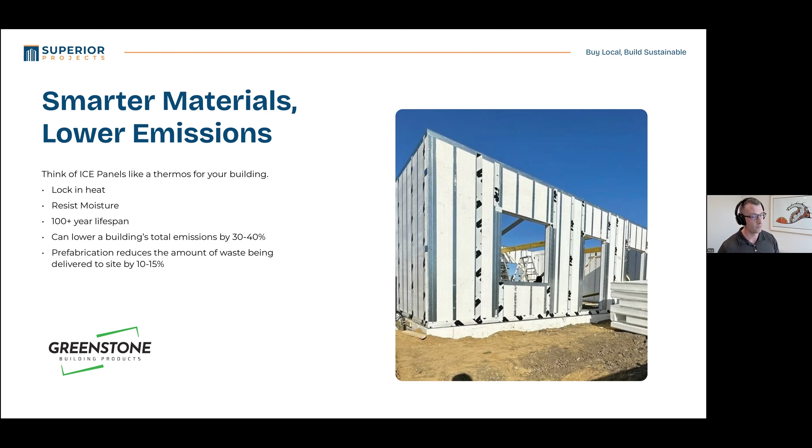You can think of ICE panels a little bit like a thermos for your building. They lock in heat, resist moisture, and provide a lifetime of permanent insulation properties. ICE panels contribute to sustainable building, but it takes more than building products to bring a sustainable building together.

Have you ever worked with a consultant who pushes for what they know versus being open to new ideas? It's easier for them. But sustainability demands creativity, technology, and continuous learning. It's incredible to have a team aligned with clients' priorities and have those priorities be sustainable ones at the same time.

In a project we're working on, it's a Super 8 hotel up in Cross Lake First Nation, or Pimachikamak. Some of the questions we got from our design team during pre-construction were very pleasant surprises. The architects, for example, LM Architecture, took an interest in learning about Greenstone ICE panels and the benefits that they could provide for the client. And they were already familiar with mass timber, so they were open to learning about new products.

And the engineering team was asking questions about the environmental cost of shipping heavier products versus constructing with lighter materials on site, and creatively designed grid lines to work with multiple systems while we explored what system would serve the client's priorities best.

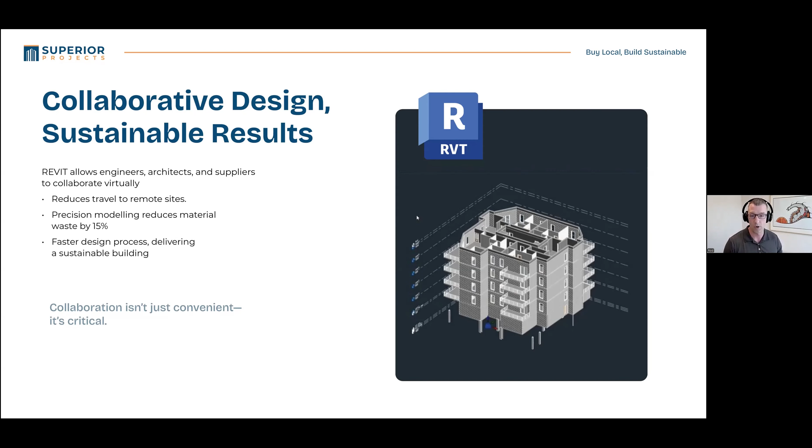Imagine spending millions of dollars on a building and it didn't capture your values or your intended purpose, but instead reflected your design team's ideas. And this happens. In our Cross Lake Super 8 project, transparency, return on investment, and cultural respect were very important to the client. And these actually tie into sustainability.

So with transparency, we're able to create an ethics accountability for the leadership within the community. And the owner gets to see the actual cost of everything, including any performance upgrades or added insulation or mechanical systems. A transparent tendering process also is a way to respect our clients' money and their reputation within the community.

On the ROI, it's not just a hotel building. It needs to be a profitable business because poverty is still a big problem within these First Nation communities. So we can't build a hotel that doesn't cash flow and doesn't make sense. So we bring to the table our experience in hotel operations and provide insight into what makes a good hotel, along with data sets and design insights to their business pro forma to make sure we're setting them up to be successful for the future as well. And that results in good information and sustainable choices by the client and a working business plan.

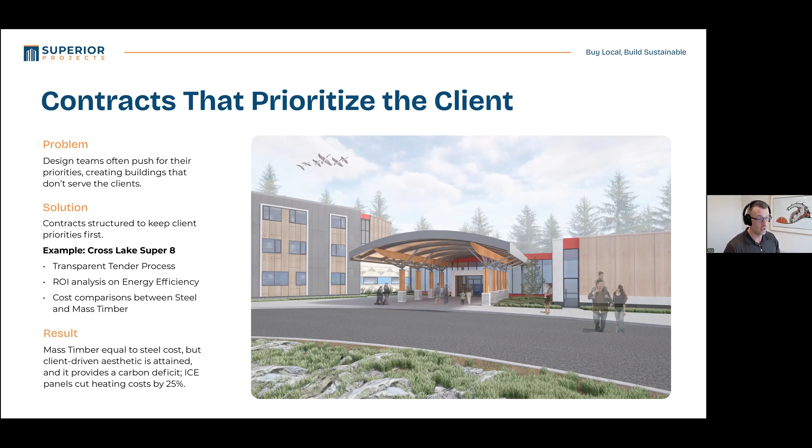And that brings me to the big picture, how local action creates a global impact. Cross Lake Super 8 proved that innovation, local supply chains, and creative teams can deliver sustainable results at comparable costs. Sustainability isn't compromise, it's an upgrade. What can you do about sustainability in your projects? Bake local sourcing and innovation into your RFPs. Don't just ask for it, require it.

Partner with firms who know your climate, community, and values. If they don't know about it, they need to be willing to learn and put in the time to learn about it. Challenge your team to innovate. Just because we've done it one way for 50 years doesn't mean that it's the right way today. In closing, sustainability isn't a buzzword, it's required for economic survival. Let's build a stronger economy together through sustainable building in Manitoba.

My presentation is a bit more on the broad strokes. Not much on data or specifics, although we can always talk about that in the comments after.

I'll talk primarily about the focus of Monteyne Architecture's work. Bobsled's been around for about a decade or so, growing from small basement renos to larger multifamily residential work.

One of the early sustainable projects for the office was the Alloway Reception Center at Fort Whyte, which our founder Tom Monteyne had the pleasure to design, working with the team at Fort Whyte, who, as we all know, are leading the way in terms of sustainable buildings and practice in Manitoba. This building was the second major building at Fort Whyte, built about 20 years ago now.

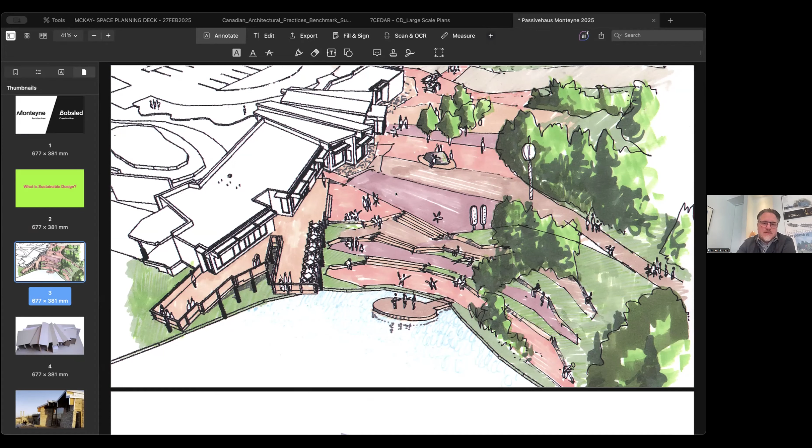It's the building you enter when you come onto site, and it has these really noteworthy Tyndall stone walls that look like dry laid stone. Some of the interesting aspects of this building are the use of a lake loop with a heat pump, so geothermal coming from the lake. At the time, it was a very well insulated, very well detailed building that performs quite well.

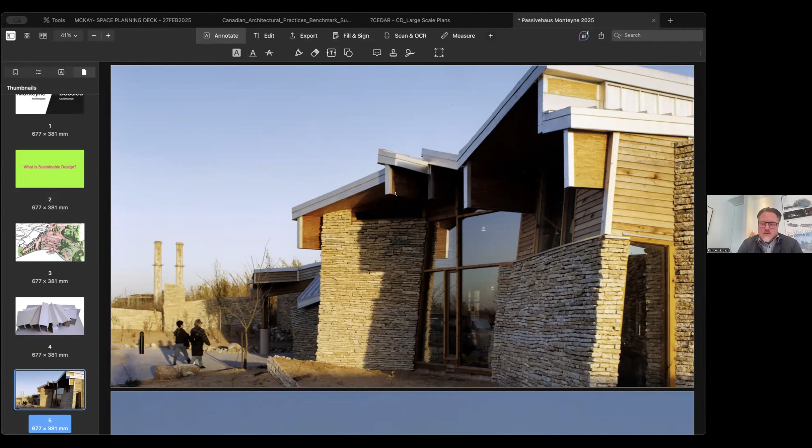It's getting to the point of end of life for some of the systems, and some of the timber is wearing out, but it's still a beautiful building.

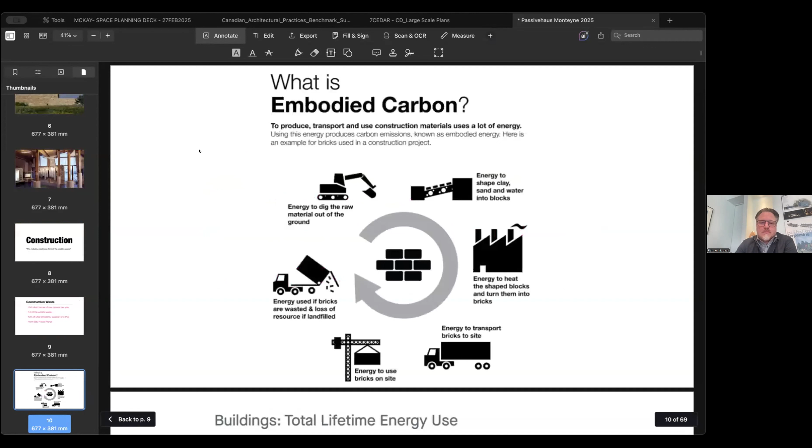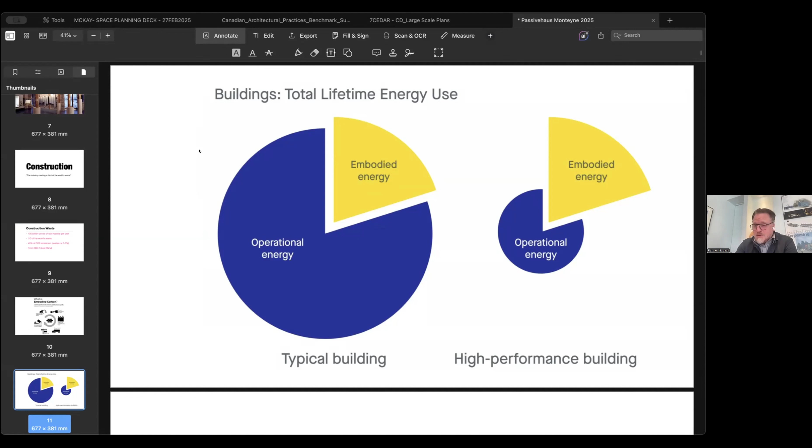As we all know, the construction industry is a major contributor to waste, greenhouse gas and carbon emissions as well. We're trying to think about ways we can improve that on a project-to-project basis. Embodied carbon, operational energy, is obviously a large portion of the energy used in a building, and a fraction of the cost of a new build. So if we focus our efforts on investment at the front end, both on design and quality construction, then it obviously pays back over the life of the building.

One of my early projects with the firm was with the Winnipeg Folk Festival, and it's not what you would typically think of as a sustainable building. The project is the backstage kitchen for the Winnipeg Folk Festival at Birds Hill, and it also functions as off-season storage. The brief requested that the building have the ability to grow, to shrink, to stay the same size, or to be removed from site completely.

In reality, that organization was accustomed to working out of tents, and this was their first foray into a permanent built structure on the festival site. But there were limitations to it. They were very concerned with the footprint on the site and being able to remove any trace, leave no trace.

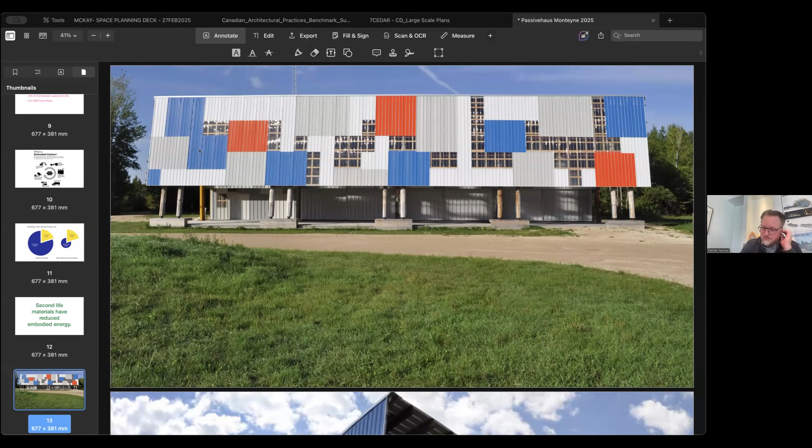I'm gonna jump ahead one slide. We were able to source a collection of industrial steel buildings that were slated for demolition. As you can see here, this is probably from, I'm going to say, 2009. This collection of buildings was being dismantled and set to go to the recycler or the salvage yard.

We visited the site. The construction manager, you see him in the center of the photo, I think in the white frame. It was thought we might just be able to use one or two of these buildings and call it a day. We quickly realized that they weren't appropriate for the design that we had.

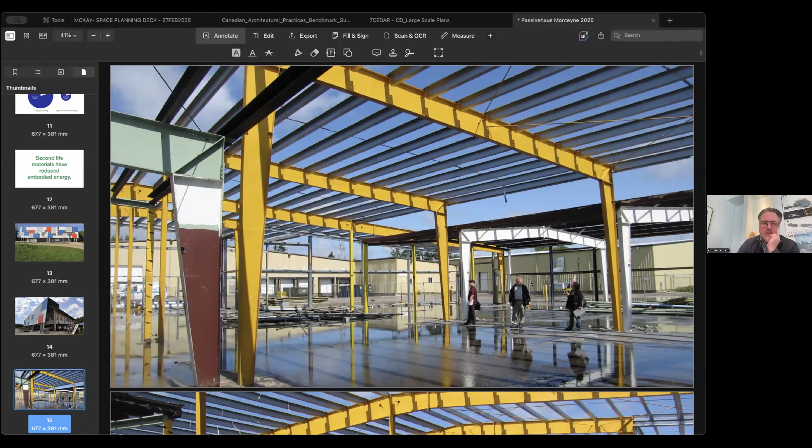But after looking at it, we recognized that the span maybe could work, and with the benefit of a creative structural engineer, we were able to look at rotating, reconfiguring, and reassembling a lot of these pre-engineered steel frames in a way that would work for the project.

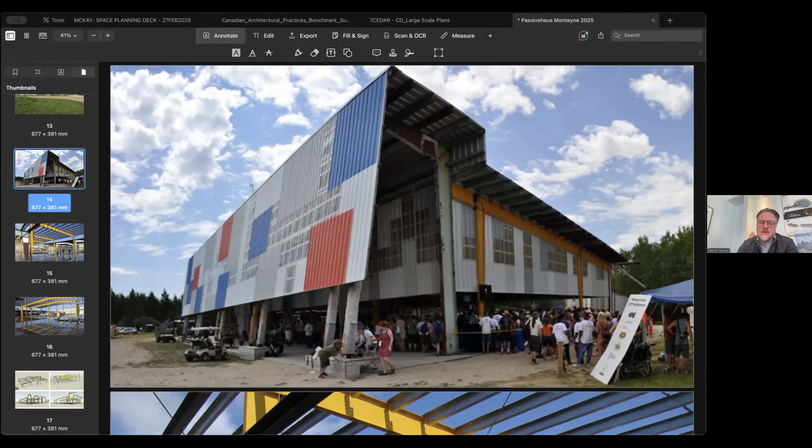It's makeshift. It's barely a building. It's very ad hoc in a lot of ways, but it fits the personality of the folk fest to a T, and it serves them very well. It's not only a pre-engineered steel building; it's also the arrival point for performers and guests to the festival. There's this large front porch that is just a welcoming spot for volunteers and performers alike.

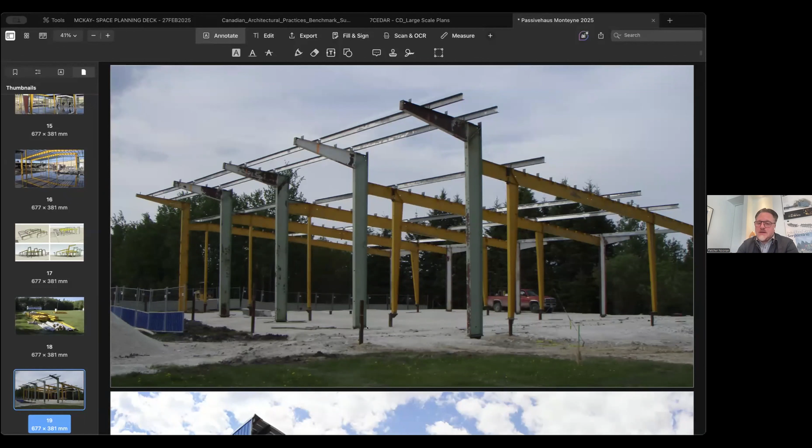So it was well received, and it was a different take, I think, on scalable design and building reuse slash repurposing. A lot of the work was done on site with site modifications to the steel. Very intensively used for short times in the year. And it was one of the first projects we've done with very large helical screw piles.

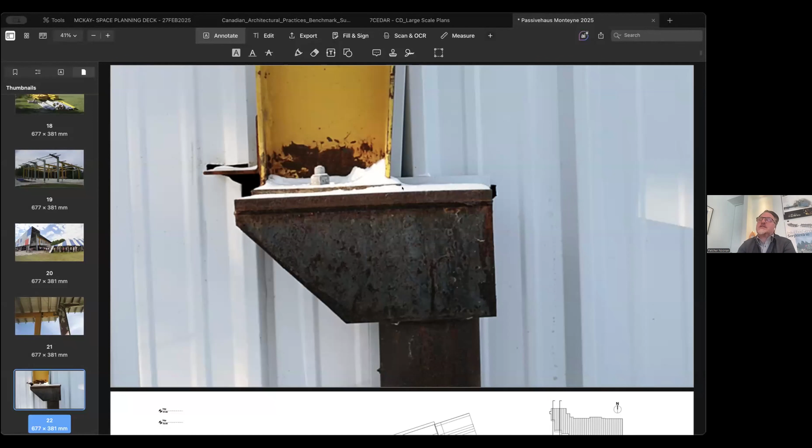So, you know, often used in deck construction, small kind of ground anchors, just get either manually or with a bobcat kind of bored into the ground and serve as your supporting for a wood deck or what have you. We had this, I guess, naive expectation that the precision on a helical ground anchor would just be spot on for everything. But as you can see at the top of the helical ground anchor and the bottom of our column, things didn't always line up the way we wanted. So it was always just a need to be flexible and work out details on site as you go.

Another one of our, actually maybe a more common typology for our offices these days is deep energy retrofits of existing buildings. A common client we have is housing co-ops. A lot of housing co-ops were built in the 70s and are reaching a point in time where their envelopes need to be replaced. They're looking at renewing mortgages. They have some capital to reinvest. So we've been doing a number of housing co-ops, adding insulation, putting in better window systems, making them more efficient with modern HRV systems. This project in particular is again with FortWhite.

This was the interpretive center, which is the building from the early '80s that a few years ago undertook a deep energy retrofit. At the time, we looked at different programs like LEED or zero carbon. We finally settled on Green Globes, just due to the flexibility of that program. There's some constraint with LEED that made it impractical. One of the primary ones was just the location of FortWhite. I'm sure you're all familiar with these locations, and up until like this weekend, I think there'll be transit access on the McGillivray side, but at this point, there is no ability to have efficient transit access, and that was a major hit on that side.

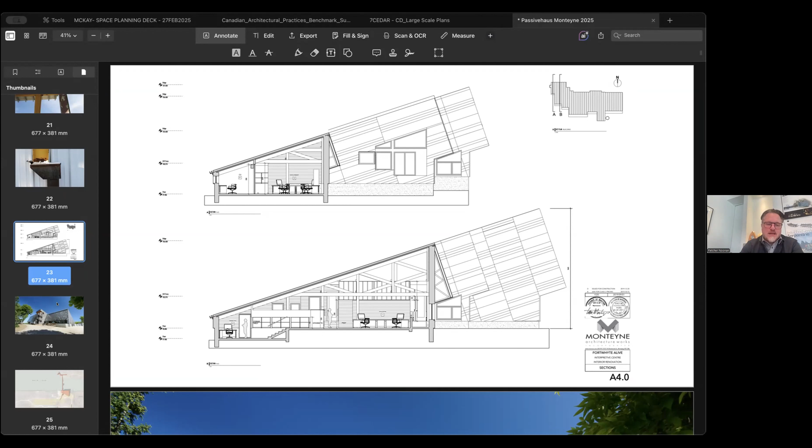But we introduced about an extra foot of insulation on this building, improved the energy efficiency; I think their heating costs are down about 70% from what they previously were. New windows, replacing cladding again. It's a beautiful building. The original building is beautiful, with beautiful wood cedar shake roofing and siding. We tried to do it justice with a new kind of metallic skin that we feel is quite successful, but I know there's always various opinions out there. But we wanted to clad it in honor with something that had a scale and texture that was reflecting the original architect's vision.

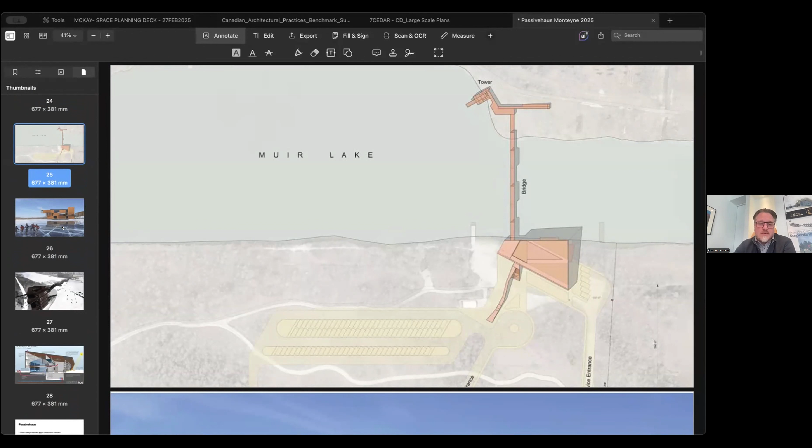And FortWhite, as we all probably know, is the new building opening up on McGillivray. We were heavily involved with the formation of that vision at the time. So a lot of the moves, a lot of the programming elements, we had helped the organization flesh out, and we're really proud of those efforts as well. There's just a couple of image shots of what happens. So if you're not familiar, a lot of times architectural offices will assist entities, companies with visioning the future of what they could be. They're looking for aid in programming or fundraising and those sorts of things.

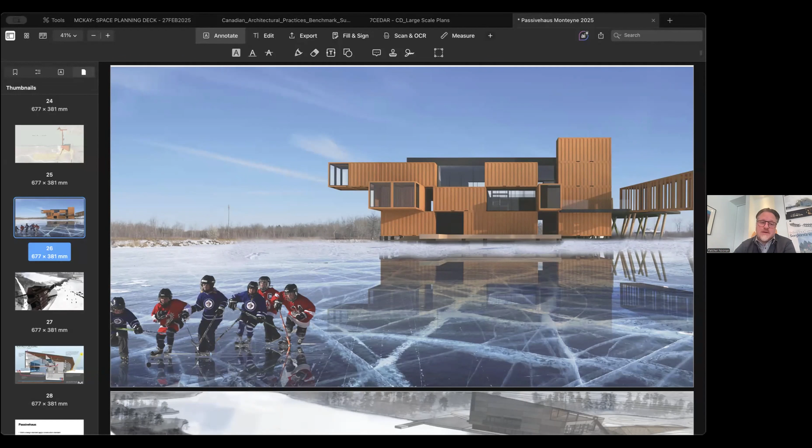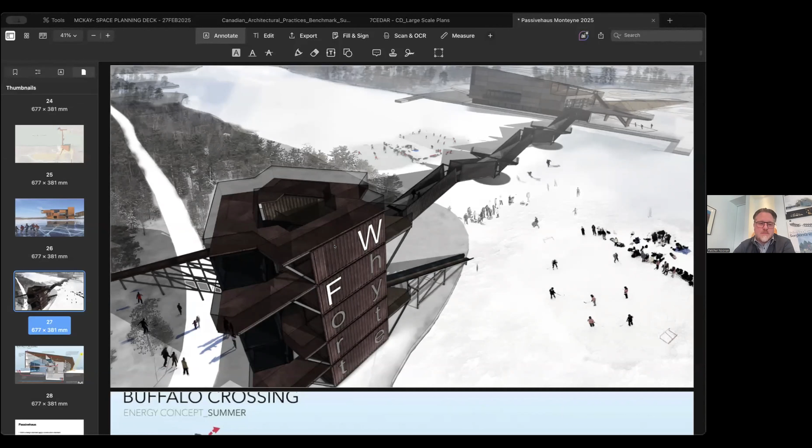So you start to develop ideas, and you often throw a lot of different things at the board and create captivating images. So there's a few things that were developed in Fort Whyte, and again, the nature of that site, it's about reuse, and it's about some industrial waste, like it'd be a former cement yard. We got into items like thinking about it as a passive building and what those systems could be and how they could be implemented. And that was kind of our first foray into passive house design and construction.

From Buffalo Crossing to today, we've been involved in a number of passive house designs. We currently have two single family passive homes in construction, both being built by Bobsled, as you mentioned previously, and we have a larger multi-family building in the design phase. So I'll just kind of breeze through these a little bit.

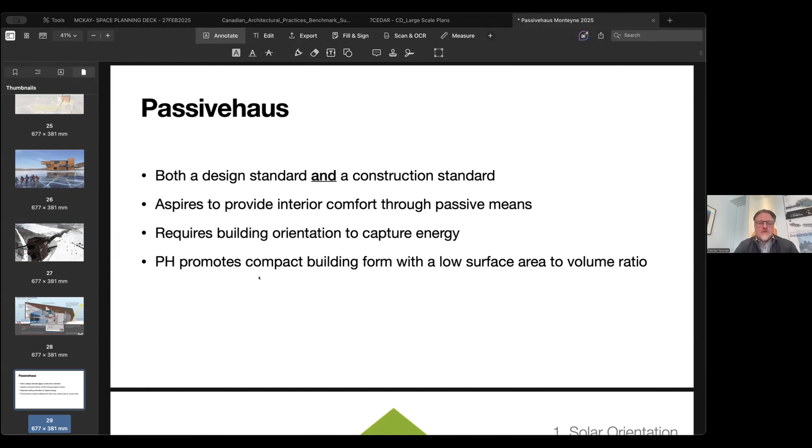Basic principle. One of the things that we found in our climate, I mean, designing and constructing a passive house building isn't easy. I think there's a lot of principles that we're now employing on everything we do. But to reach a point where certification is realistic, it takes a lot of rigor, and it's a large commitment.

You find that because we're working hand in hand with the builder on these projects, the detailing and the air sealing isn't necessarily our greatest challenge. I think the greatest challenge comes earlier on in the design phase and working with the client to really determine the coordination and the layout of rooms, and just having all of that known to be able to distill it into an efficient form.

But as an architect, we're also interested not only in the performance of the building, but the effect that it has, the comfort, and really a big part of successful building, ensuring that a building will last and be cared for, and that it's loved by its users, its occupants. So a lot of care is taken to give the owners and the community a building that will be kind of embraced.

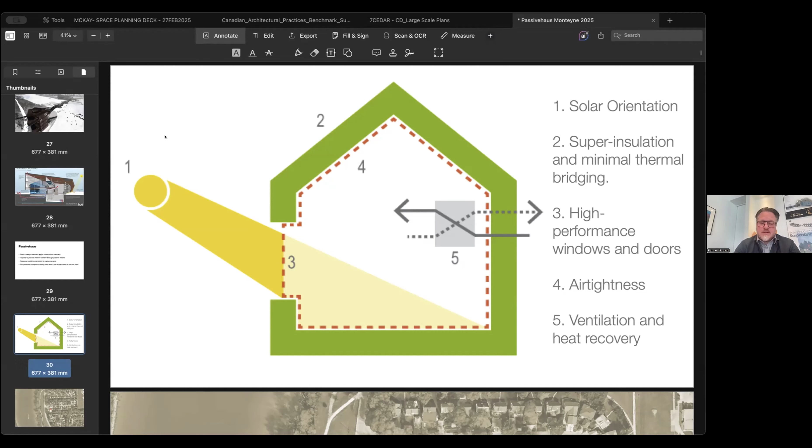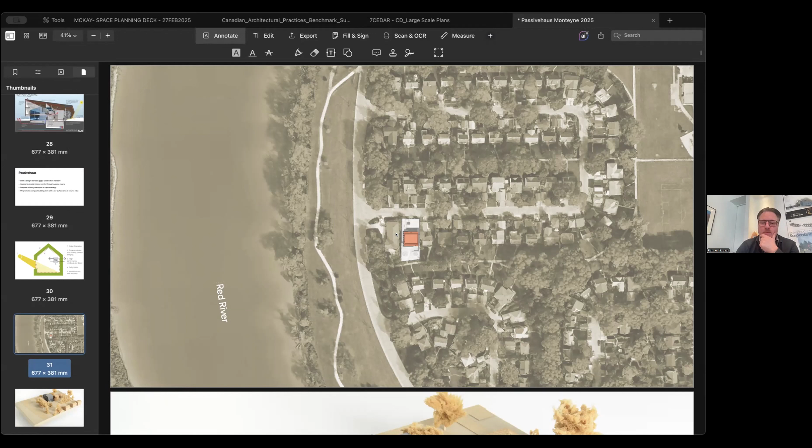This project is a single family home on Cedar Place in Norwood Flats, just off Lyndale Drive. You can see the Red River on the left of the screen, and Lyndale Drive is kind of in the center. The reddish square is a single family house that is currently under construction, and will be done later this summer.

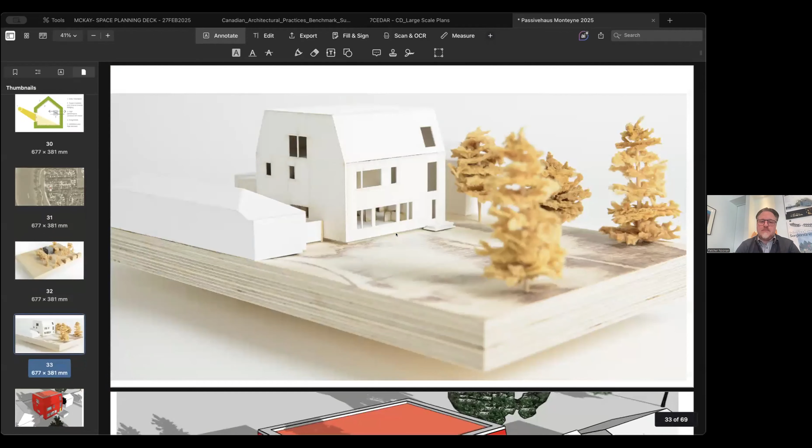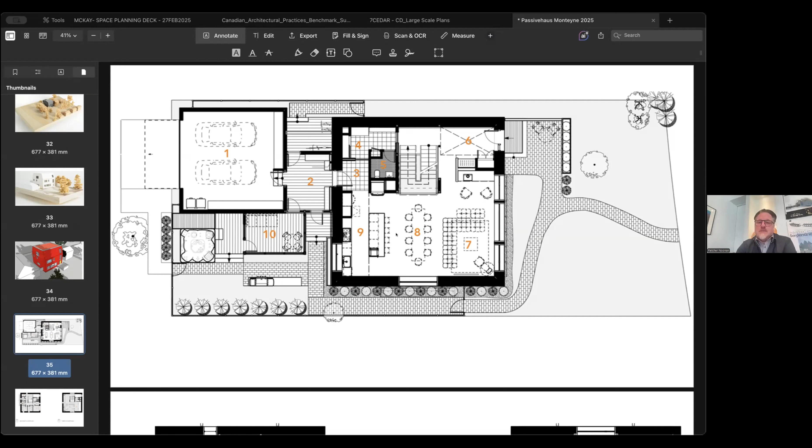And the layout in this case is a single family home, but the one thing that stands out in these images is the thickness of the exterior wall. It's that way thick, it's almost 2 feet thick. There's a 2x6 structural wall, and then a non-structural engineered wood truss on the outside of that. That's about 20 inches deep and is filled with cellulose insulation.

If you just want to wrap up so we can move to questions. Oh yeah, for sure. Yeah, and I'll leave it at this project.

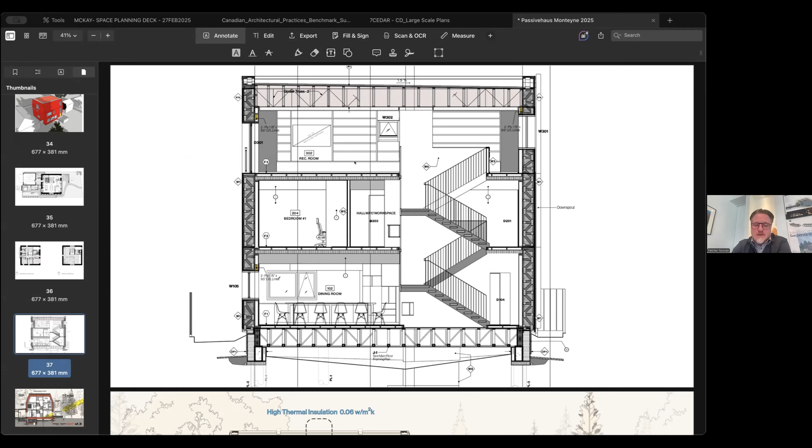So again, the section. This house is built without a basement, which in some ways is an interesting aspect of it. We have a 3-foot deep floor joist that again is full with cellulose, and a 3-foot deep roof joist again with cellulose. It's one of the schematic drawings. A rudimentary rendering of the house and the house in construction.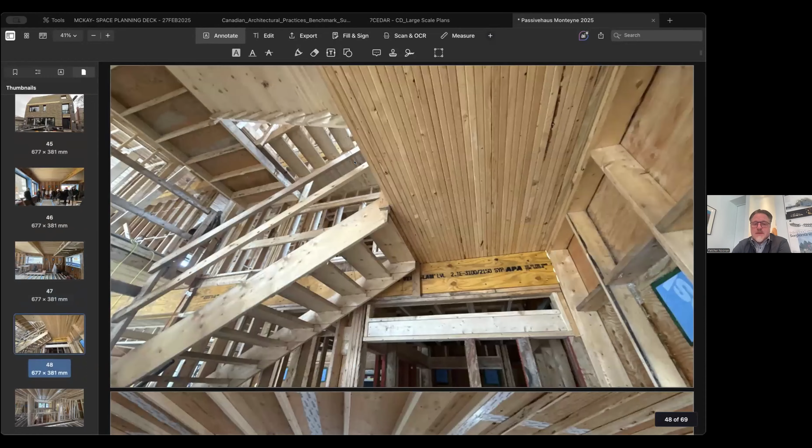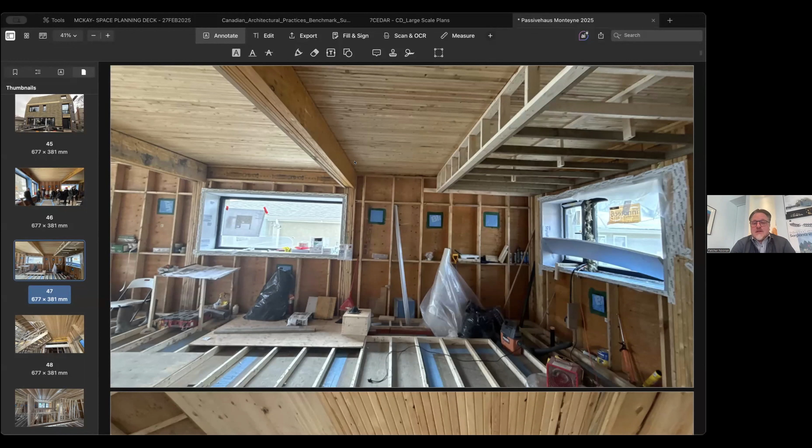We talked about mass timber a little bit. In this house the floor structure is NLT, nail laminated timber. We've been using that on some of our multifamily work as well, as a way of reducing the amount of drywall. For one; two, it reduces the floor thickness, so allows us to keep our building height and volume down a little bit, and depending on the situation, it's an appropriate ceiling finish as well. So we're happy with that approach. It's not appropriate everywhere, but it can be quite effective.

Another house that is under construction, that was in Wolseley. Noteworthy about this is just the site configuration and all of the factors on the site, leading to what would otherwise be a very odd form. And the shape and the massing of the house wouldn't be found on any other site.

But the combination of dealing with the river, trying to capture views, trying to be a good neighbor to the existing building fabric around, trying to orient the building in a manner which captures enough solar gain, and again capturing views out, and respecting the stability of the riverbank, all played an impact on the form of this particular project. And so it was a challenge in a lot of ways.

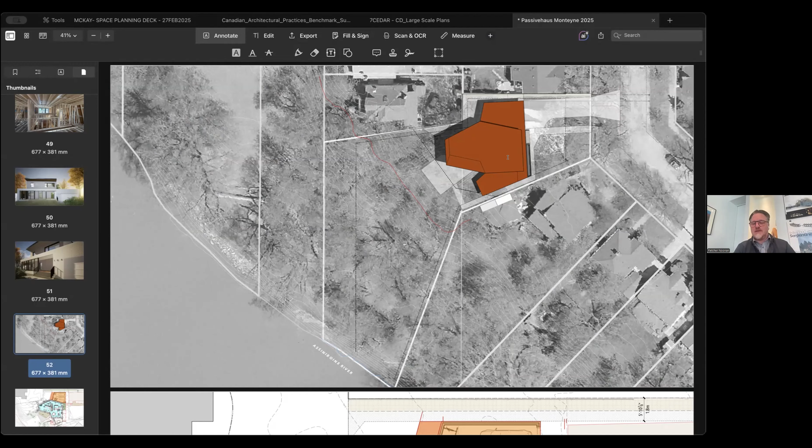A site plan, some other images of it, and then this plan is just, we find sometimes non-orthogonal plans, and it's not because we want to do that. It's often just that all the other factors of yards, streets, and those sorts of things lead that way, and orientation for solar and passive plays into that as well. But I'll leave it at that.

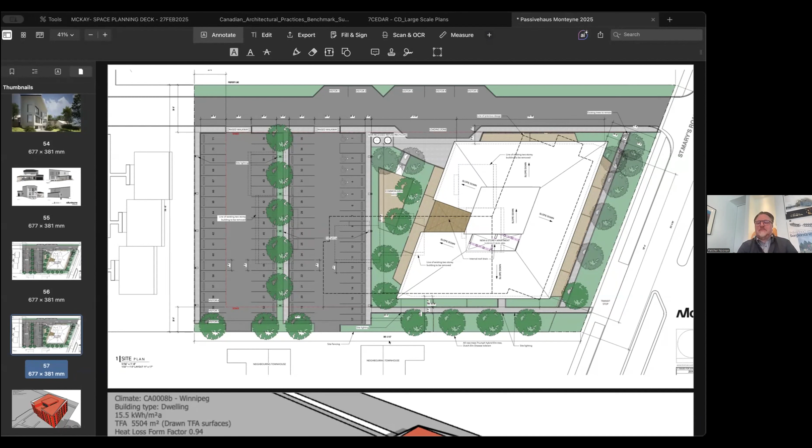All right, great. So we're going to move on to questions. So we've got a few in the chat here. So Fletcher, if you just want to stop sharing your screen, that'd be excellent. Yeah, I'll find it. All right.

So for starters, for Rod, did you do overall life costing for your project in addition to looking at mass timber? In particular, I'm curious about the insulation. What are the embodied carbon implications of EPS? Were alternatives considered? Yeah, great question.

We often consider life cycle cost. We also include rebates from Manitoba Hydro and operational maintenance costs. We also take into consideration that, as a contractor, we might finish a project, but the project's never finished; there's warranty calls and things that come down the road along with building performance. And if it's not right, it ends up being our problem. We have those scenarios that happen.

So we look at insulation properties, specifically expanded polystyrene being 98% entrapped air, very efficient use of hydrocarbons, and very effective at dealing with extremely harsh environments, especially in a northern climate where open cell insulation products like fiberglass or some of these other options tend not to fare well and don't provide the same performance.